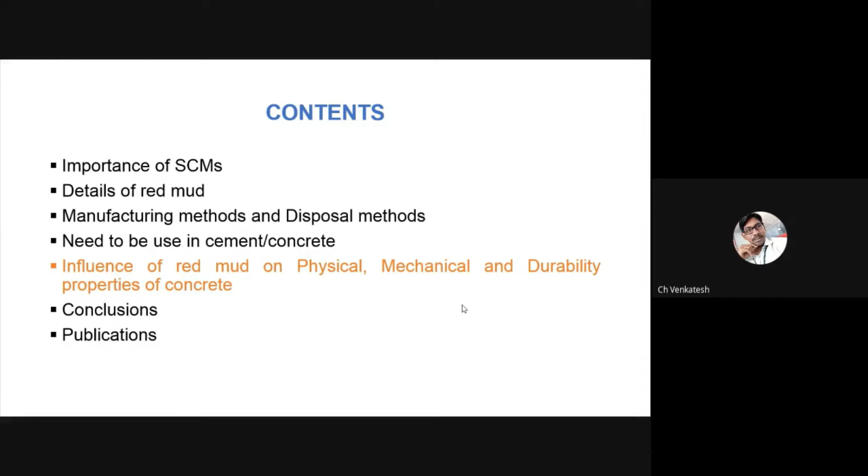Before going to the actual topic of red mud, let me explain the fundamental concept of using supplementary cementing materials in concrete, because the title itself mentions supplementary cementing materials in eco-friendly concrete. So what is the meaning of supplementary cementing materials? Supplementary means it is an alternative cementing material.

So what is the need to take an alternative cementing material into the concrete instead of cement? Does cement have any problem? Technically speaking, there is no problem with cement, but from the point of environmental concern, there is a problem. As we know, concrete is the highest consumed material after water and earth.

For preparing concrete, every year more than 4,000 million tons of cement is utilized. Each ton of cement production emits approximately 0.8 to 1 ton of carbon dioxide. Every year, 8 to 12 percent of carbon dioxide emissions come from cement industries into the environment. This is a major contribution. Seriously, cement causes several environmental problems like pollution due to carbon dioxide and consumption of many natural resources, leading to a scarcity of natural resources for forthcoming generations. So I think you might understand that there is a problem with cement from the environmental point of view.

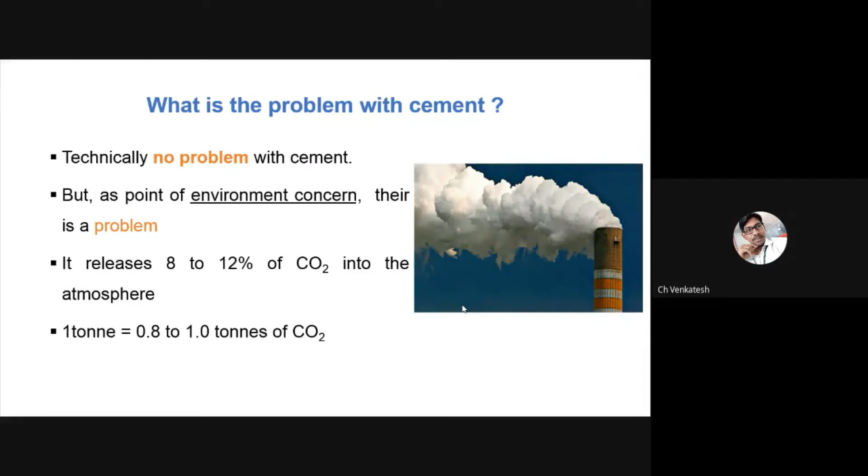Then, if there is a problem with cement, what is the need of using supplementary cementing materials? Do supplementary cementing materials take out this cement from the problems? Let us discuss this elaborately.

In this world, many major industries already exist, like alumina industries, steel industries, thermal power plants, silicon industries, and many agriculture industries. Each industry disposes of million tons of waste in open lands every year, which causes several environmental problems. For this reason, the industrial management as well as the respective government of the state is worrying about disposing this waste into the best possible method.

On another side, concrete researchers are also searching for the best alternative material to replace cement and prepare eco-friendly concrete. In the early ages, concrete researchers started doing research on industrial byproducts.

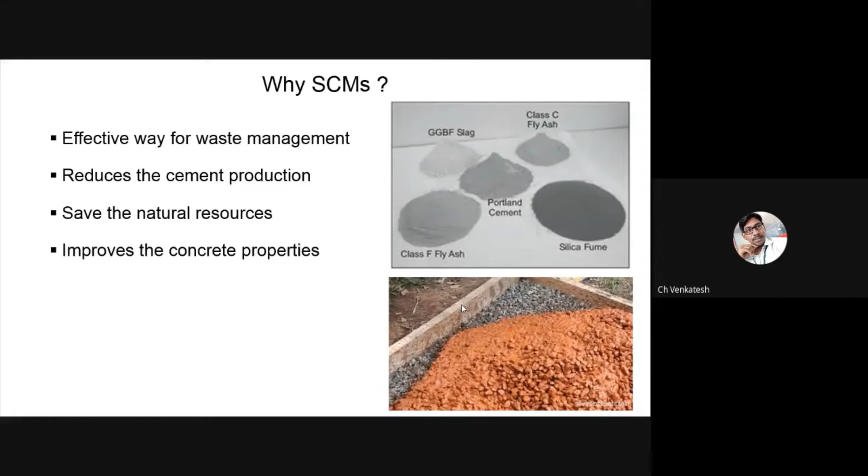They found some industrial byproducts like fly ash from thermal power plants, GGBS from steel plants, red mud from alumina industries, silica from silicon industries, and rice husk ash from agriculture industries. They identified these cementitious materials and incorporated them into concrete, and concluded that these alternative cementitious materials not only help minimize cement production and pollution due to industrial disposal, but also give good strength and durability to concrete. This is the reason why we use supplementary cementitious materials in concrete. So here, why I am explaining about these supplementary cementitious materials is because red mud is also a supplementary cementitious material.

So that's why that concept may be utilized in the future.

So coming to today's topic, red mud. Red mud is a byproduct of alumina industries. As like fly ash is a byproduct of power plants, and GGBS is a byproduct of iron industries, red mud is a byproduct of alumina industries.

In the alumina industries, the Bayer process has been adapted to extract alumina from the bauxite ore. The main aim of the Bayer process is to extract the alumina from the bauxite ore. Let me discuss this in detail. In the Bayer process, the raw bauxite ore is dissolved in concentrated NaOH with high pressure and temperature.

In this process, some of the waste comes out from the filters, and that is called red mud. Here in the Bayer process, 1 ton of alumina produces more than 1.5 tons of red mud as waste.

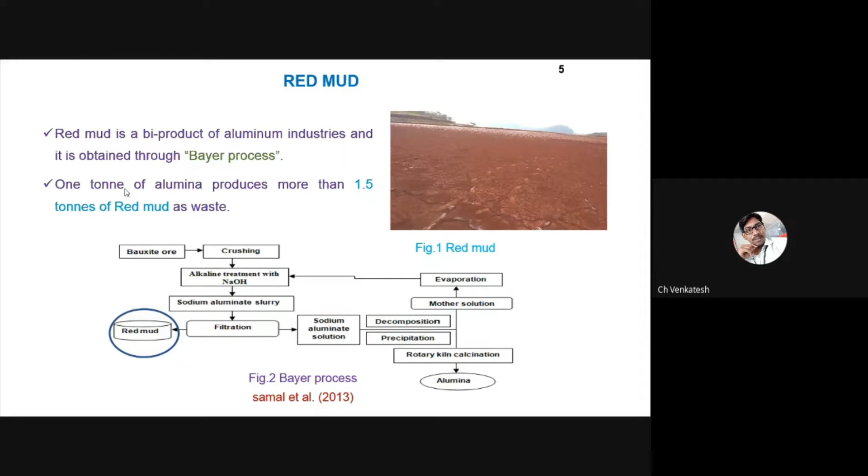So here comes the disposal of the red mud. Every year more than 300 million tons of red mud is produced throughout the world. Similarly, in India itself, 25 million tons of red mud comes out from various alumina industries, those are Nalco, Balco, Hindalco, and many others. This huge disposal is very difficult and requires a lot of land.

Throughout the world, two effective disposal methods are followed for the disposal of red mud. One is the lagoon method, another is the lake method. In the lagoon method, artificial ponds are created for disposing of this red mud in slurry mode or dry mode. In the lake disposal method, the red mud is directly disposed into water bodies like lakes, seas, and rivers.

Even though these are effective disposal methods, there are certain disadvantages. At any cost, the disposal of red mud on open land is very dangerous to the environment, because it has a high alkaline nature. This high alkaline nature doesn't help any vegetation grow on the open lands.

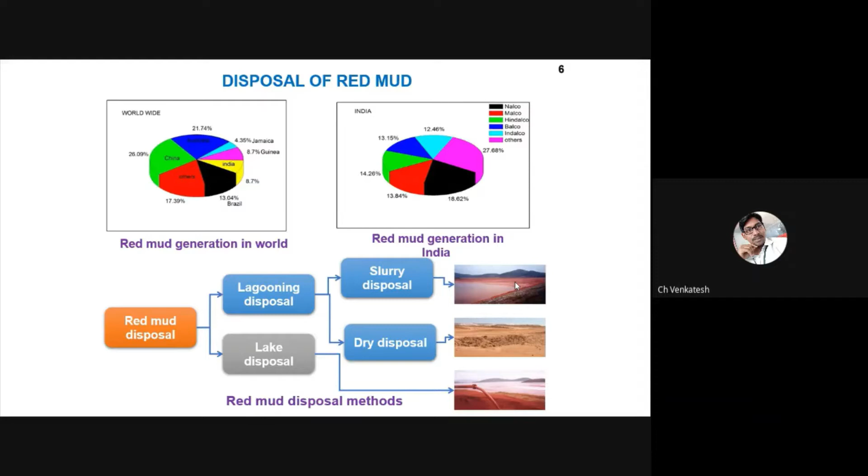So obviously this is a huge disposal problem, and it is very difficult to dispose of. In such cases, industrial management has planned to use this red mud in some building materials, such as preparation of bricks, stabilized blocks, and lightweight aggregates.

Some industries are also encouraging using this red mud as a paint. Other industries have suggested that we can produce polymer products and ceramic tiles, and also utilize it in metallurgical industries.

Anyway, their major aim is to reduce pollution due to red mud. For that reason, they started investigation on utilizing it in building materials. But from the existing literature, this usage is limited to about 4% of the actual disposal, which is very less.

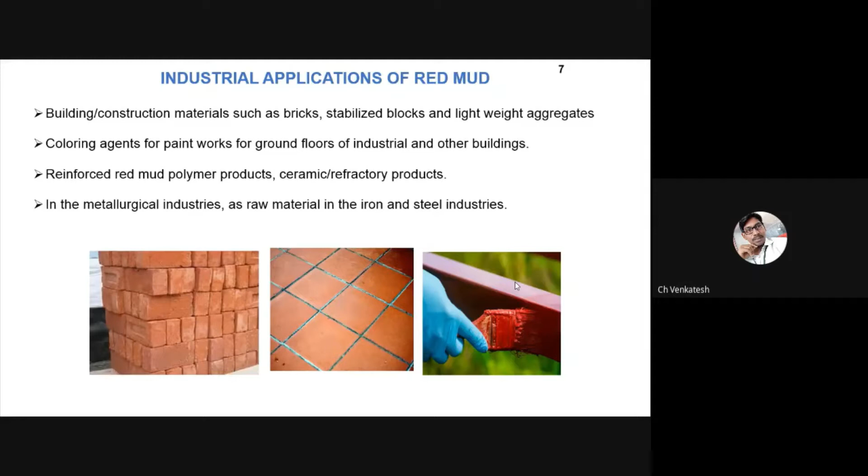So it is very less, and they have not been satisfied. So what more are they doing? Further research to dispose of it in a more effective manner.

So they thought that concrete is the highest consuming material. If you use red mud in concrete, we can minimize the pollution due to its disposal, and on another side, if you use red mud in concrete, there is a chance of reducing the production of cement. So both advantages will help the environment. Because of that reason, red mud is being utilized in concrete.

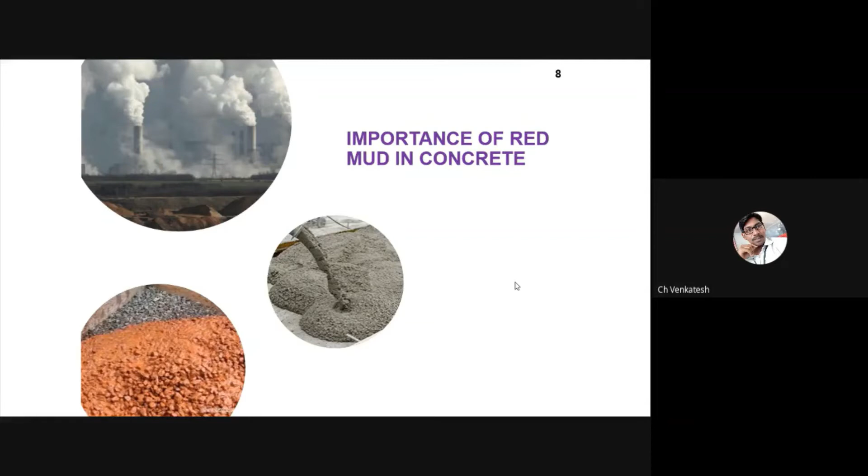Even for this reason, I have selected red mud as my research material. So coming to the research methodology.

We cannot use any industrial byproduct in concrete without knowing its physical and chemical properties. If you want to add or replace it in cement, you should know the physical and chemical properties of that material, and check whether it is suitable for the concrete environment or not. Otherwise, it's a waste of time and money.

So in my research, I started investigating its physical properties, like specific gravity, density, particle size analysis, specific surface area, and mass loss.

Also, the chemical properties, like how much percentage of chemical compounds are present. So I investigated, and based on my investigation, I understand that yes, the red mud has some cementing property, but it requires some push-up, which we have to give either by adding chemicals or by heating at certain temperatures. So in this process, we have adapted the heating process.

So why did we choose heating instead of adding chemicals? If I used any chemicals in the red mud, there is a chance to damage the concrete's health. It may reduce the heat of hydration process, create internal voids, or create surface cracks or shrinkage cracks.

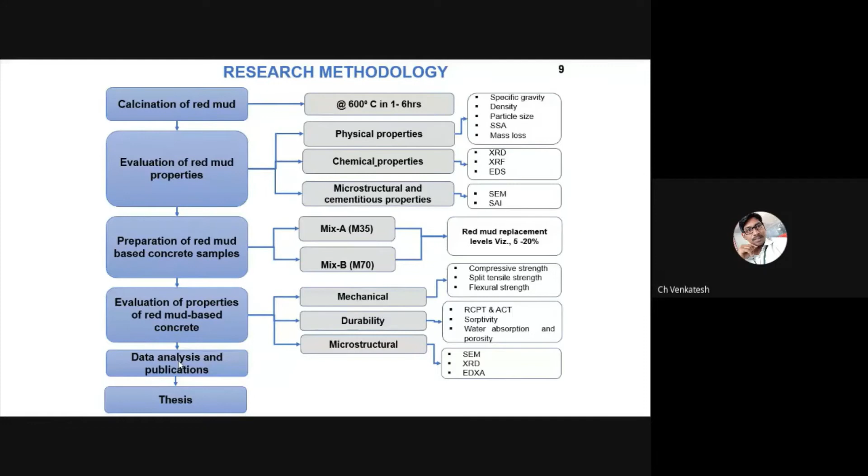So coming to this point, as I told you earlier, we cannot directly keep any supplementary cementing materials into the concrete. So here we found specific gravity, density, particle analyzer, specific surface area, and mass loss.

I think you might be aware of how to identify specific gravity. We have the specific gravity bottle, or we can call it a pycnometer. You take the pycnometer, first weigh it empty and consider it as W1, then add some 25 to 50 grams of cement depending on the pycnometer volume, and weigh that along with the pycnometer—consider it as W2.

After that, you fill the remaining portion with kerosene. Kerosene is a non-reacting liquid, which is why we use it. Then weigh it and consider it as W3. After that, throw out all the materials and take the empty weight of the specific gravity bottle. So we have the formula, and by applying that formula, you get the specific gravity value.

Like with the help of the density bottle, you can also find the density, and we have the particle analyzer. So I found the particle analysis results, and up to 2 hours of heating, the specific gravity, density, particle size, and mass loss were reduced. The reason is that due to the continuous calcination process, the moisture present in the particles is evaporated.

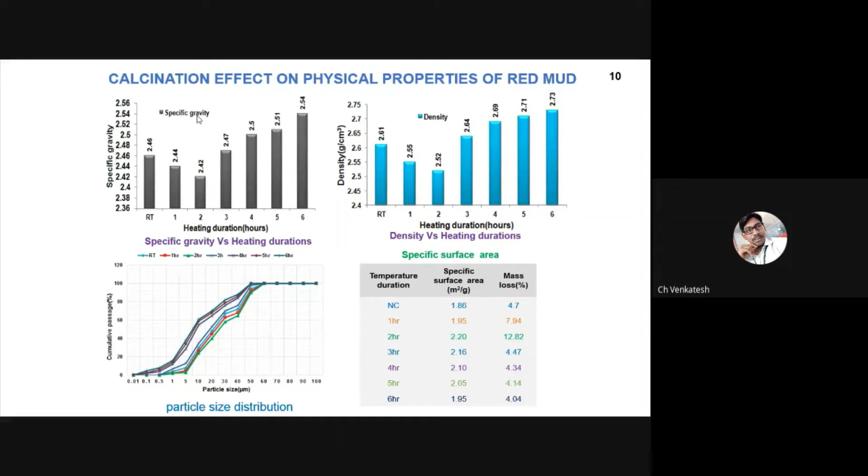Coming to the X-ray diffraction analysis, in the present study we need to know how, with respect to temperature, the red mud changes its transformation. For that, we conducted the X-ray diffraction analysis, and you can clearly observe here that at 0 hours, goethite, hematite, gibbsite, and boehmite were present.

After heating for 1 more hour, the boehmite is converted into alumina. So initially gibbsite converted to boehmite, and boehmite converted into alumina, as seen throughout the XRD peaks.

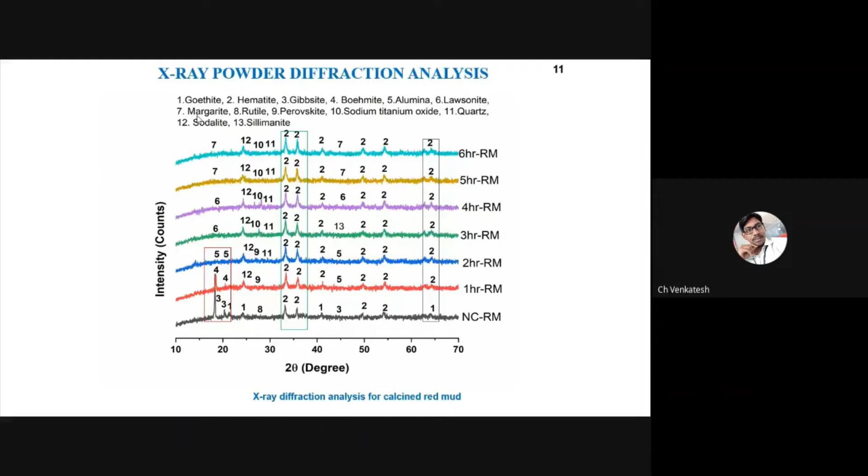Iron oxide is a stable phase, because from existing literature they have mentioned that only after calcining the red mud at 1600 degrees temperature is there a chance of transformation in the iron oxide.

Similarly, here we have conducted scanning electron microscopy analysis to know how the surface morphology of the red mud particles varies with respect to temperature.

From this study, we identified that at 2 hours of calcination, the particles are poorly crystalline. You can observe in diagram A compared to B, B is much smaller than A, and after B there is an increase in particle size.

In the physical properties, we identified that up to 2 hours of heating, the particles are losing their moisture. That's why the physical properties are reducing.

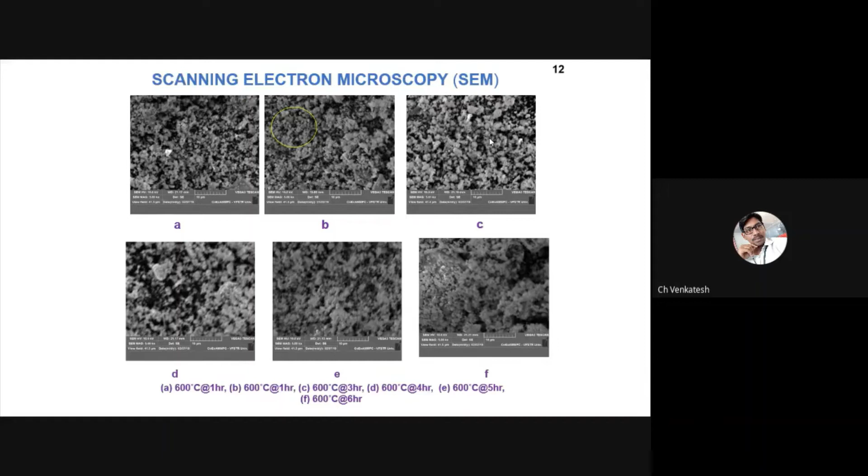After 2 hours of heating, an increasing trend was observed due to agglomeration between the particles. So from this SEM analysis, we can justify that after 2 hours of heating, agglomeration takes place, and there is a good correlation with the physical properties.

Coming to a very important study - we have identified physical and chemical properties. Now, an SCM's duty is to be incorporated into cement and concrete, so we need to know its pozzolanic property. If we want to use any cementing material in concrete, we should know its pozzolanic property. There are generally two methods.

One is the calcite consumption method, another is the strength activity method. Here I am explaining the strength activity index method - this is a very important study. I conducted this strength activity index test with the help of ASTM C618. The study is very simple.

First, you need to prepare a normal concrete sample, cure it 28 days in water, take out the sample, and identify its compressive strength. Similarly, you prepare a concrete sample with the help of your cementing material, cure it 28 days, and identify its compressive strength.

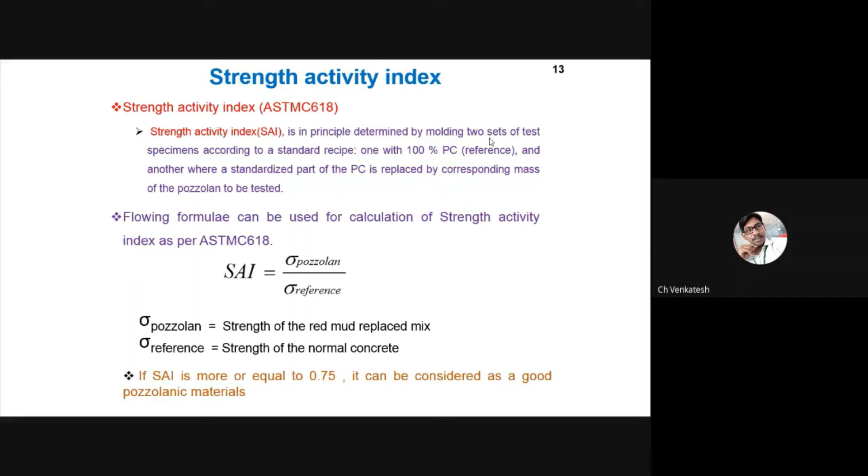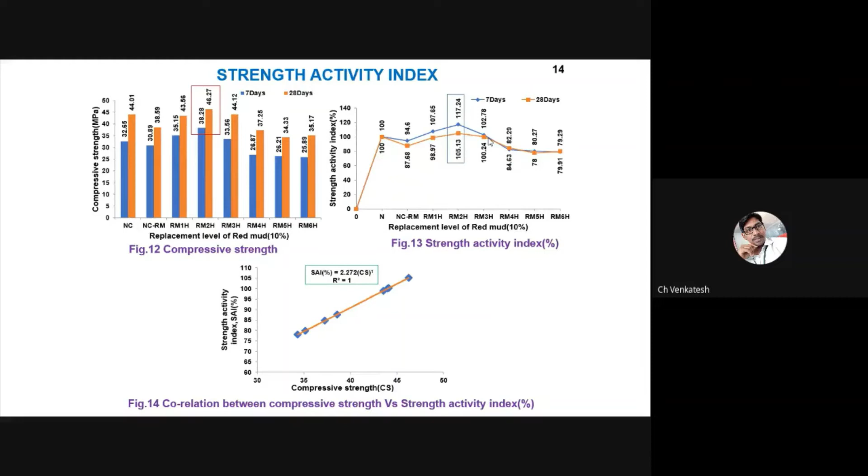Then I randomly replaced 10% and evaluated the compressive strength of all the calcined red mud samples. I obtained that 2 hours has got maximum higher strength, because in the microstructure analysis we also proved that at 2 hours calcination time, the red mud particles are poorly crystallized - that's why we got maximum strength here.

Coming to the physical and mechanical properties - here onwards I will spend much time on how to perform the study, and I will take 2 to 3 minutes to explain how the results varied.

In the physical and mechanical property studies, I have explained that 2 concretes are prepared. If you want to use any cementing material in concrete, you should understand how the material performs in the design mix, nominal mix, and high strength mix. For that reason, in my study I took 2 grades of concrete - M35 grade and M70 grade.

In the physical properties, I identified fresh properties - setting time, flow table test, and slump test. In the mechanical properties, I identified compression, split, and flexural strength.

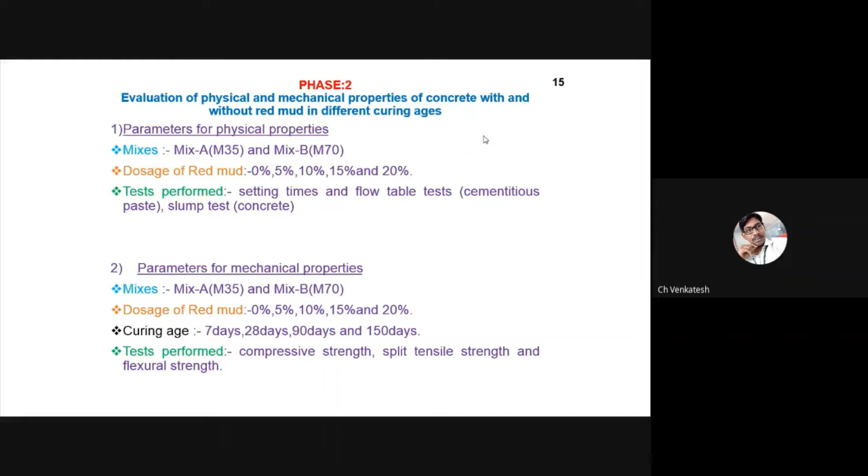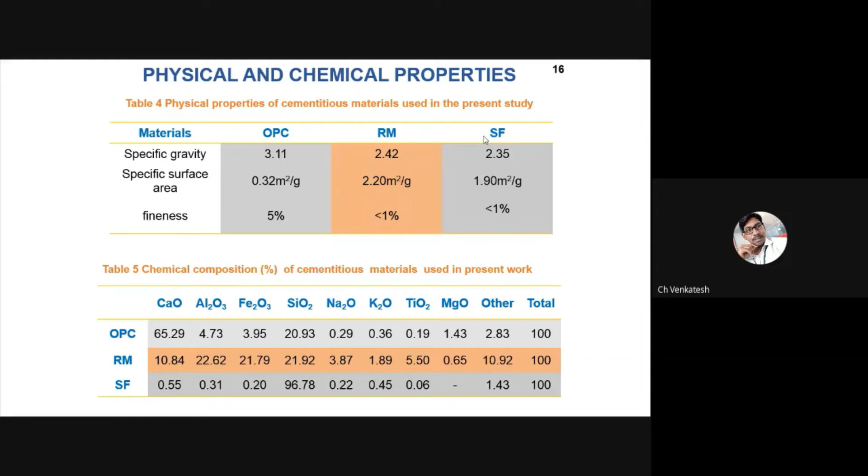Only then will we achieve high strength. Okay, now coming to the fresh properties.

In the fresh properties, as I told you earlier, I have conducted the setting time tests. You know about initial setting time and final setting time. With the help of the Vicat apparatus, we can measure both the initial and final setting time as per IS code 4031. The minimum initial setting time should not be less than 30 minutes, and the final setting time should not be greater than 600 minutes.

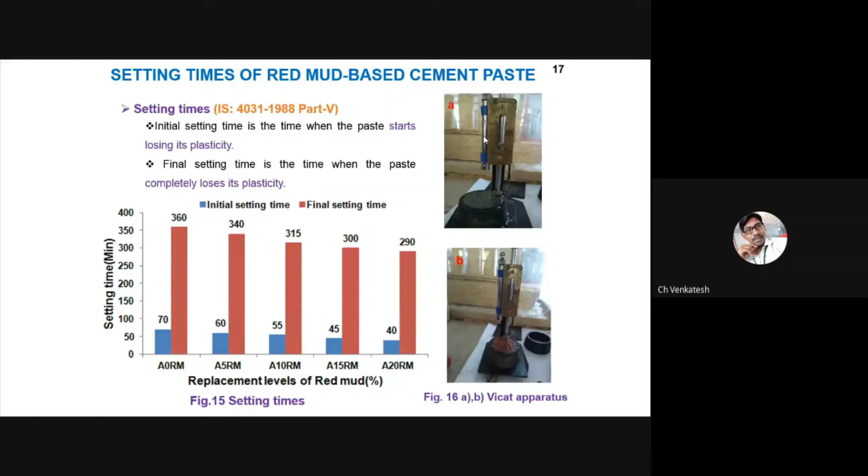In my study, increasing the replacement level of red mud decreases the setting time. The reason is that red mud contains a higher percentage of sodium and aluminate, which accelerate the hardening process. From this result, I can tell you that whenever you are constructing a building or structure in cold countries, red mud may be very helpful for the hardening process.

Coming to the flow table test or slump cone test, I used to call this our workability study. Here in the workability study, we conducted the slump flow test and slump cone test. You might be aware of the slump cone test, but in case of the slump flow test, we have the slump flow apparatus and mold. We need to pour the cement paste or red mud paste into the mold and apply 25 tamps with the help of 25 hits.

Due to that hitting, the red mud paste or cement paste spreads. You need to measure how much diameter the cement paste has spread. Based on that, you calculate the flow value of your cement paste or red mud cement paste.

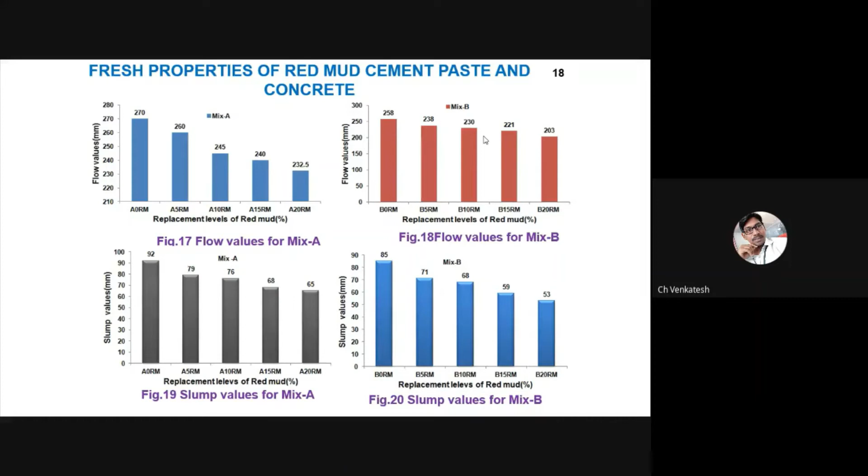Here also, as we increase the content of red mud in the concrete, the workability is reduced. The reason is that red mud particles are very fine particles. Whenever the particles are very fine, they absorb or demand more water. This is the reason for reducing the workability.

This is the mix calculation I used in my research work. This was done as per IS 10262:2009.

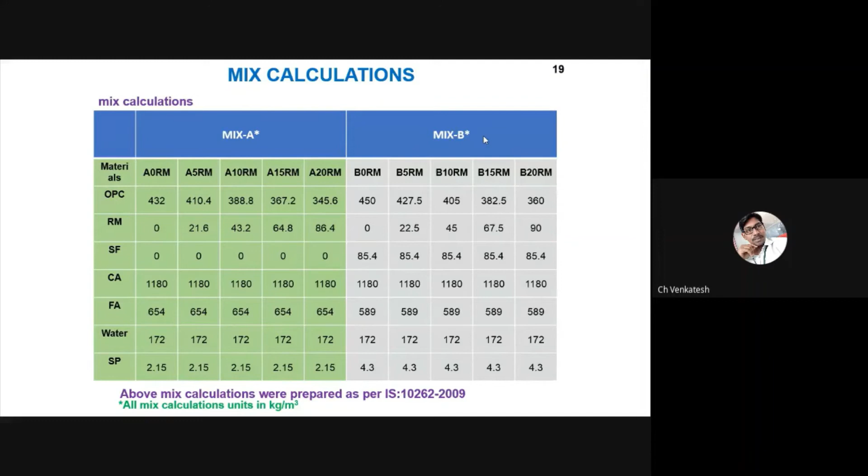Coming to the mechanical properties, okay. We prepared the concrete cube samples with a size of 150 by 150 by 150. After casting the concrete specimens, after 24 hours, the specimen was demolded. After 28 days, curing was applied, and on the next day after 28 days, we took out the sample and performed the compressive strength test.

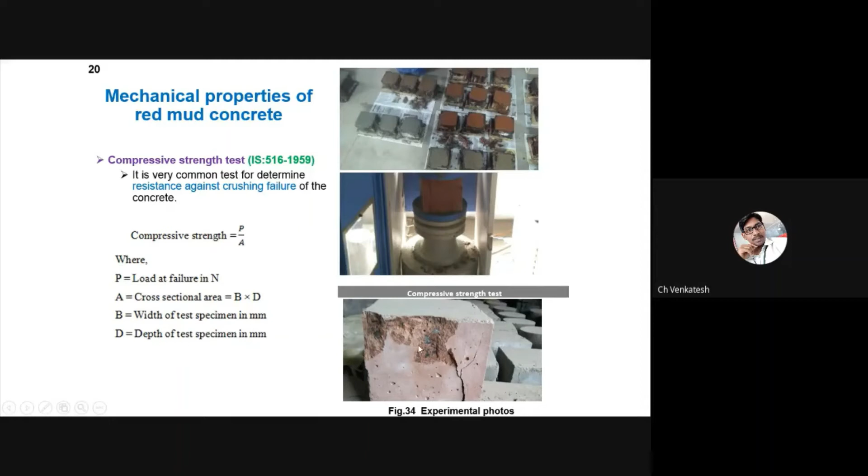So from the compressive strength test, what do we get? We can get the resistance against crushing failure — how much compressive load the concrete sample can take before failing. You divide the load by the area and you get the compressive strength. Here you can clearly observe the crushing failure.

Coming to the next one, split tensile strength. Strictly speaking, there is no direct method to identify the tensile strength of concrete, that's why I call this the indirect tensile strength. Here you can also clearly see how the concrete sample splits exactly. In case of the concrete cube, we applied the failure load on the surface of the concrete sample, but in case of the split tensile strength, the sample was completely split. The reason is that in case of the cube, the load contact area is very high, while in case of the tensile strength test, the load contact area is very less.

You can see here in the compressive testing machine, the load is initially applied on a steel rod, and that steel rod rests on the concrete specimen. So the area where the rod contacts becomes critical, and there is a chance of developing more critical stresses at that point. That's why the concrete sample splits.

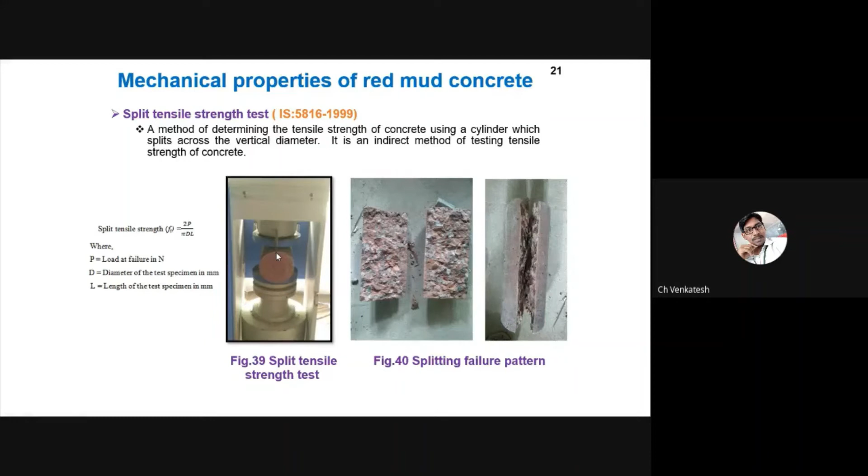Coming to the mechanical properties, as I told you earlier, I performed the compressive strength, split tensile strength, and flexural strength tests. In this study, the compressive strength increases up to 10% red mud replacement. After that, a reduction was observed in all the mechanical properties. The reason is that at 10%, there is sufficient pozzolanic property, but after that, due to insufficient water availability, the pozzolanic reaction is minimized. That's why after 10% replacement, all the mechanical properties are reduced.

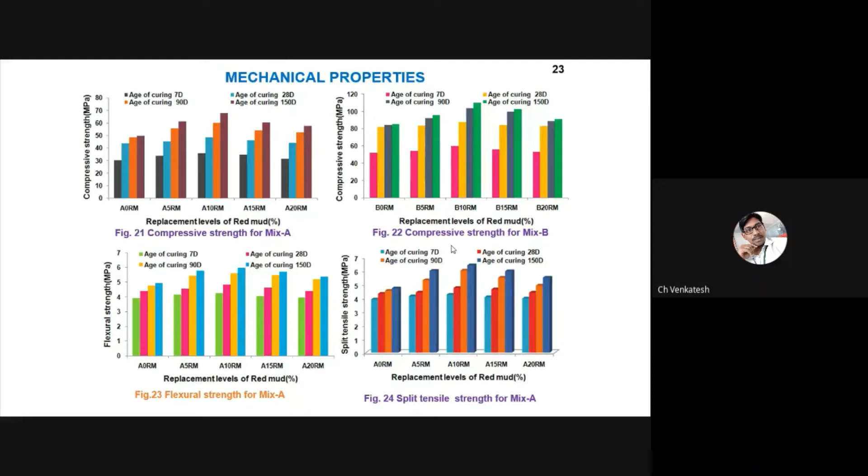Okay, so coming to the normalized values. Even all cementitious materials will definitely increase a certain percentage of the mechanical properties. So what is the speciality of this red mud?

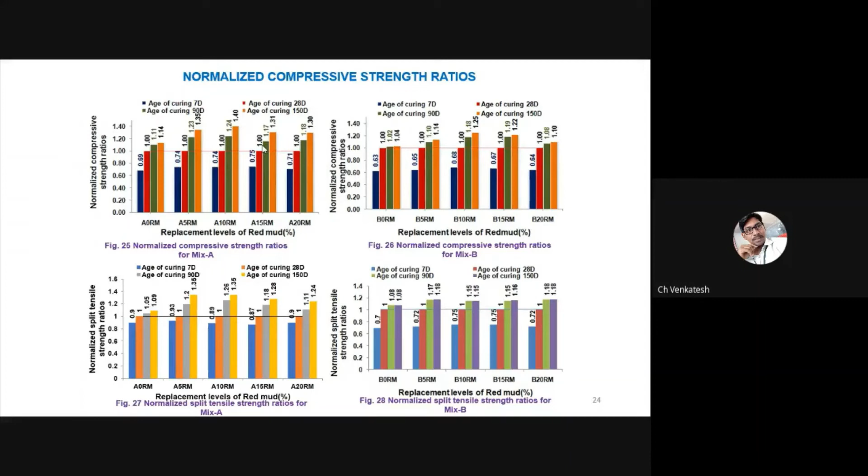As I told you earlier, these red mud particles are very fine particles. They hold the surrounding moisture content, and that moisture content is utilized for the secondary pozzolanic reactions in the later ages. This is the reason for developing high strength in the later ages also.

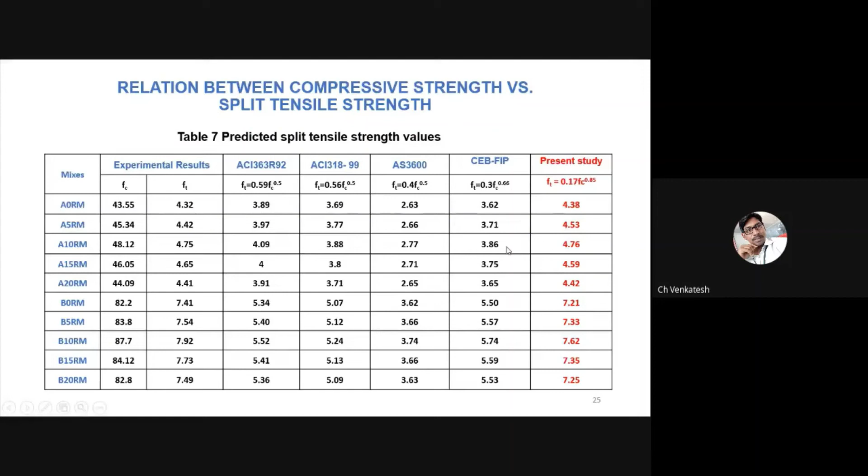Very interestingly, in my study I also compared my results with existing IS codes, and I have prepared a formula based on my investigation: 0.17 FC to the power 0.85. I prepared this formula from my results. I compared my formula with all the existing codes - ACI code, Australian code, and European code - and found a good correlation with my results compared to the other codes.

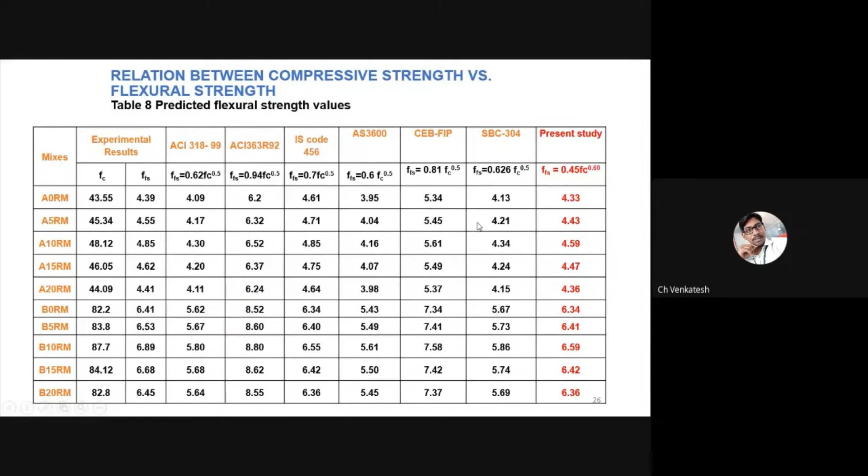Coming to the very important aspect - durability. Some concrete has high early age strength, some has later age strength. But when it comes to durability, the concrete should be durable from day one up to its lifespan, whatever lifespan the concrete has. Durability is nothing but maintaining the engineering properties of the concrete over its lifetime without change. That is called durability.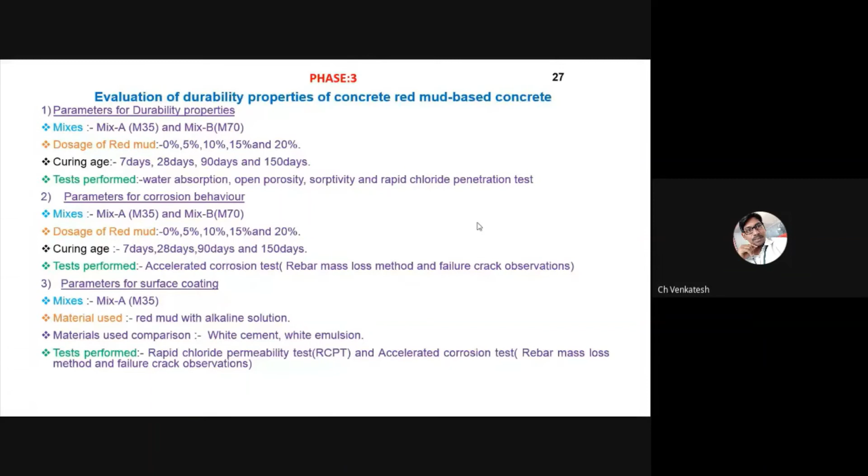In the present study, to understand durability, we have conducted water absorption, open porosity, sorptivity, RCPT, and other studies. Let me explain the studies elaborately, then I will skip the result part. Coming to water absorption - I performed this with the help of BS code 1881-122. This code suggests that, first of all, if you want to know the water absorption - what is water absorption? The concrete absorbs an amount of water when it is completely immersed in water.

For this study, we have to prepare the concrete sample, cure it for 28 days, and after that keep the sample in an oven at 105 centigrade for 72 hours. The reason for keeping the sample in the oven is to take out the moisture present in the concrete sample. After that, you can take the dry weight of the sample.

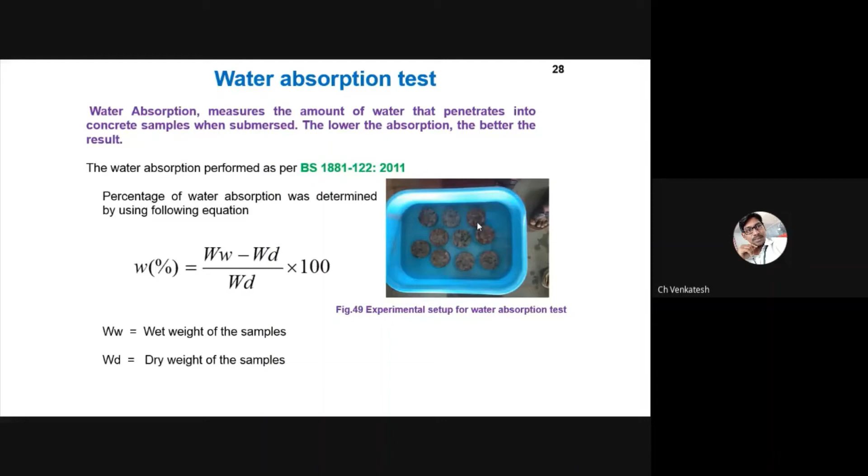Then you keep the sample in water for 24 hours. After that, take out the sample, wipe out the surface moisture, and weigh that sample - you consider that as the wet weight. Wet weight minus dry weight, divided by dry weight, into 100, will give you the water absorption percentage. If the concrete absorbs more water, that indicates poor quality. If the concrete absorbs less water, that concrete is more durable.

Similarly for porosity - I conducted this as per ASTM C642. The main aim of porosity is to find out the amount of void space available in the concrete particle. For this study also, we have to take a known volume of water, and as I told you earlier, we have to dry the sample at 105 degrees for 72 hours to remove the moisture content.

After that, for porosity, you also need to keep the sample in water for 24 hours so that no further water will be absorbed by the concrete. Then you keep the sample in that known volume of water - once you place the concrete sample, the water volume will increase. The actual volume of water minus the increased volume of water is used to calculate the porosity percentage with the help of this formula.

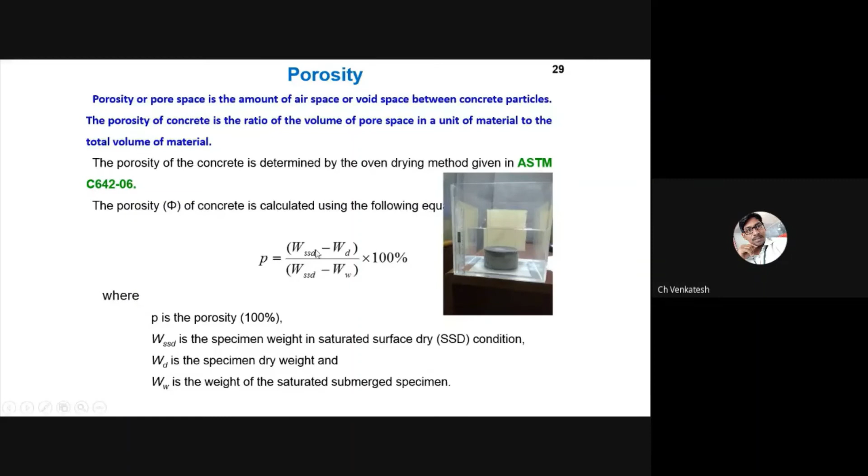So the next one is sorptivity. This is also one of the important tests. Sorptivity is nothing but the water absorption by the concrete sample through capillary action.

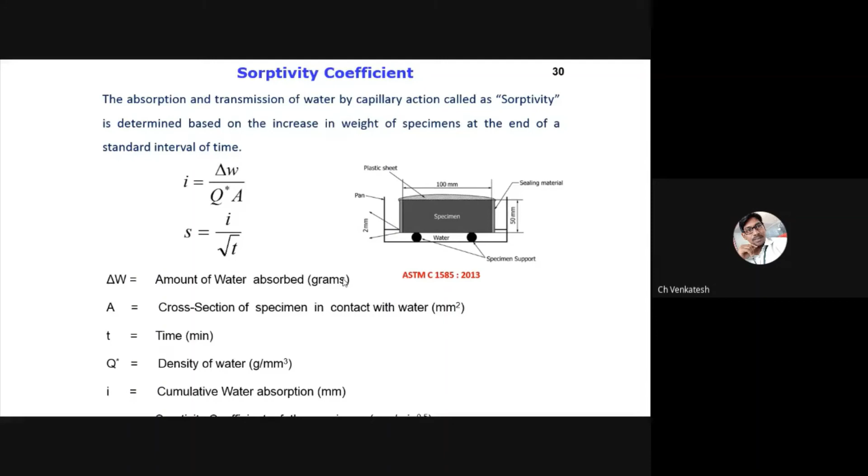In this process, we have to prepare the concrete sample with a size of 100 diameter and thickness of 50 mm.

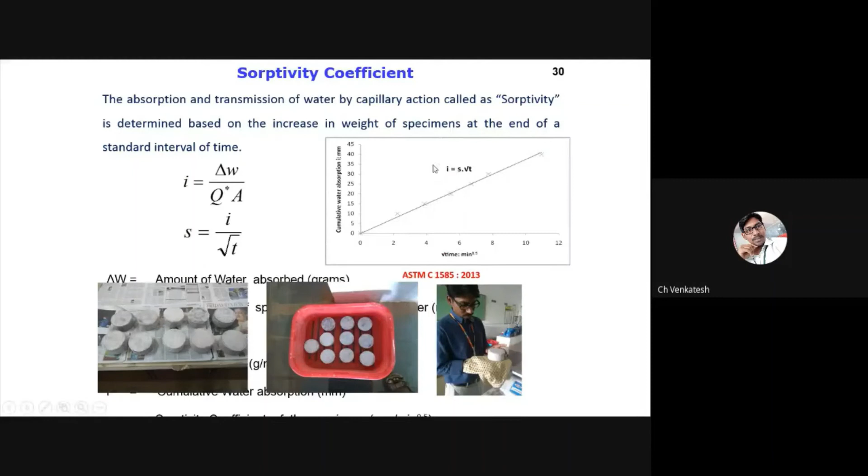We have to apply wax on three directions, so one direction is free, meaning we can allow water to penetrate from that uncoated side. We measure the weight gained by the concrete sample with respect to time using the formula i/√T, and analyze the results to get the sorptivity value.

Coming to a very important test, the rapid chloride permeability test. It is a powerful test to identify the permeability of concrete. As per ASTM C1202, we conducted this RCPT test.

Here there are two chambers. One chamber is filled with sodium hydroxide, the other is filled with 3% NaCl. The concept is that whatever NaCl is present in the chamber should pass through the concrete sample and reach the NaOH.

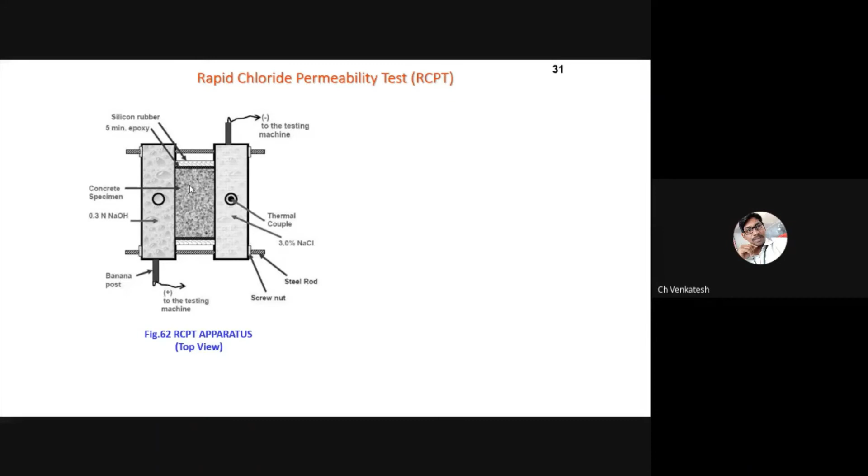This passage happens with the help of 60 volts of current. If your coulombs passed is more than 4,000, the concrete has poor durability. If it is 2,000 to 4,000, the concrete quality is moderate. Like that, we have to justify the performance and quality of the concrete.

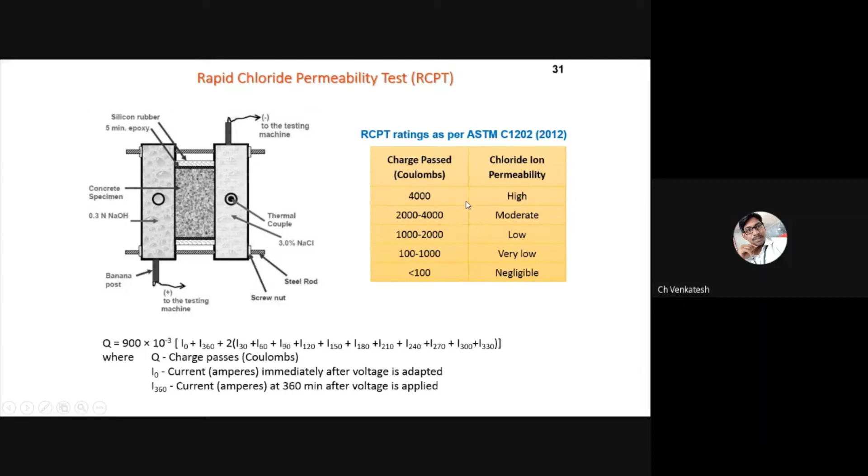Coming to another powerful tool, the accelerated corrosion test. In this, we have to identify the corrosion behavior of the concrete. For that, you have to prepare a cylinder sample with a diameter of 100 and height of 200. While casting the sample, you have to insert the steel rod inside the concrete from the bottom up to 50 mm, which we generally call the cover.

Here also you have to connect the positive cable to the steel bar and the negative cable to the steel plate, then apply continuous power of 10 volts until you get the crack.

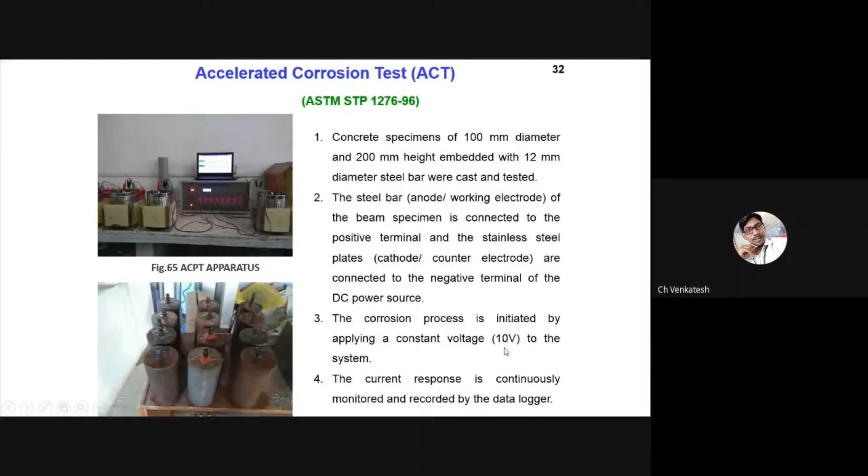After corrosion, the sample will look like this. You can see here clearly how red mud behaved compared to the normal concrete. In the normal concrete, the sample is completely corroded, while in the case of red mud, it is only partially corroded.

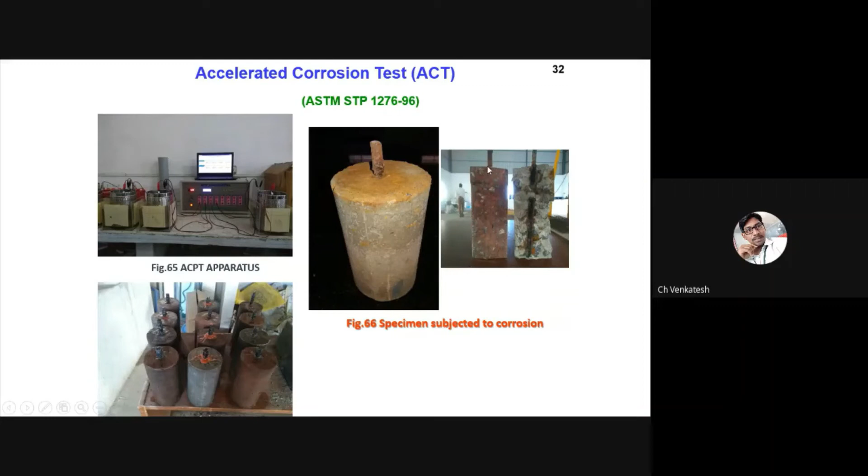So from all the durability tests—water absorption and porosity, sorptivity, passage of coulombs, and corrosion—increasing the replacement level of red mud increases the durability. The reason is that most red mud particles occupy the concrete pore structure, becoming a seal to the concrete so that no external agents can enter inside the concrete. This is the reason for the good durability property.

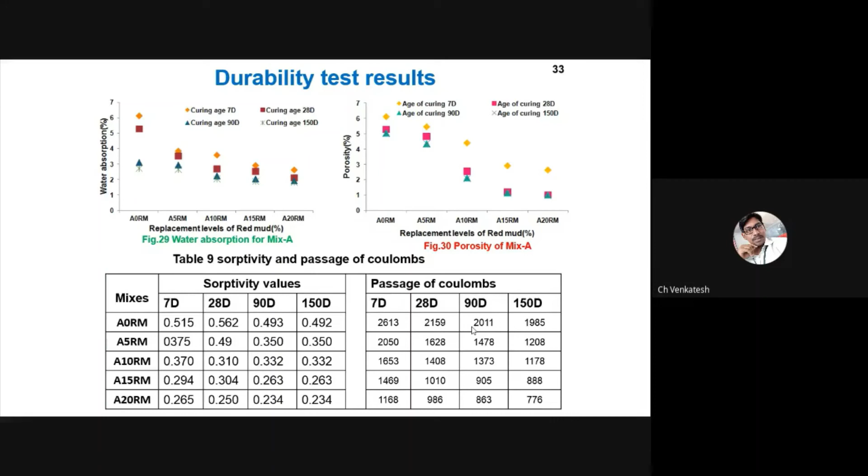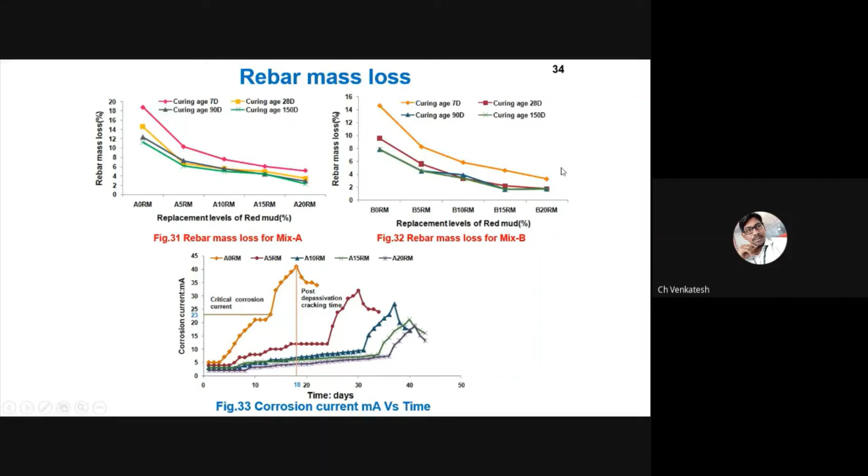In the corrosion test, the mass loss is also reduced with increase in red mud. We can measure corrosion in two ways: up to crack observed, or up to mass loss. In both cases, a similar trend of results was observed.

Coming to the sampling for microstructure analysis, I will finish within 2 minutes, so just be patient. I conducted the microstructure analysis because I had proven that red mud has good mechanical and durability properties from the experimental study, and I needed to justify clearly whether the concrete's inner properties support this behavior or not.

In my study, I conducted SEM analysis and XRD analysis. For preparing the sample for XRD, after 28 days of curing, you identify its compressive strength, take the sample from the broken test piece, grind it into powder, and perform the X-ray diffraction analysis to find the hydration compounds present in your concrete at that age.

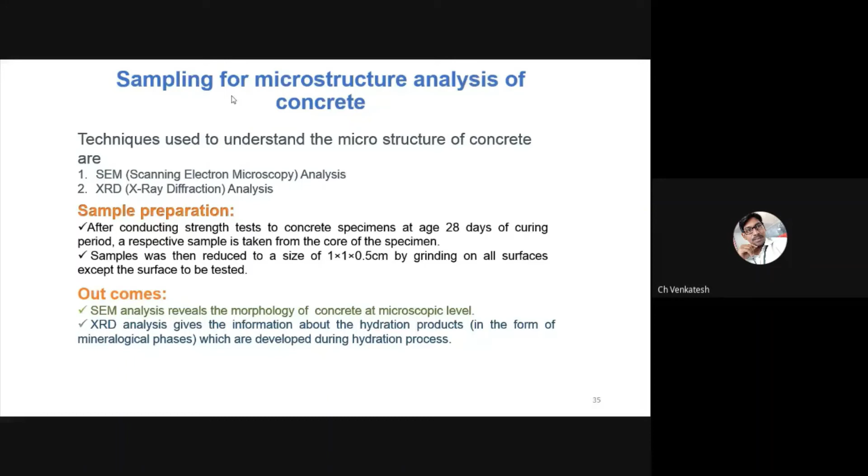For SEM analysis, you don't need to grind it into powder. You can give a solid piece with the size of 1 cm by 1 cm by 0.5 cm, so that you can know how the concrete surface is formed.

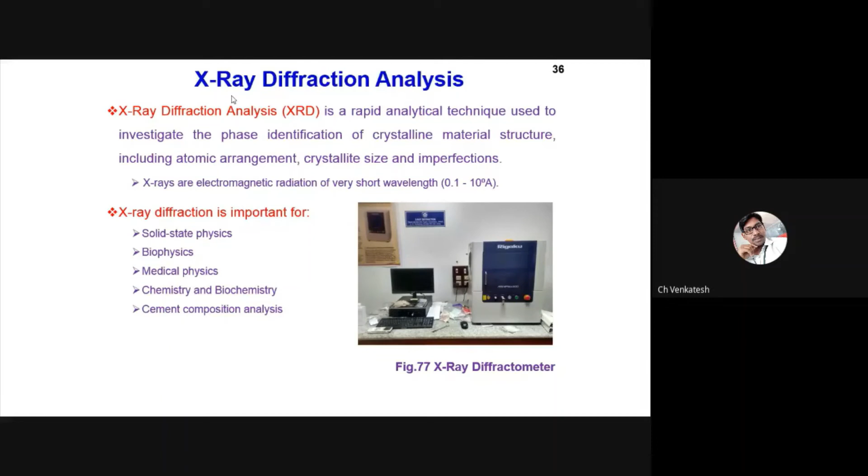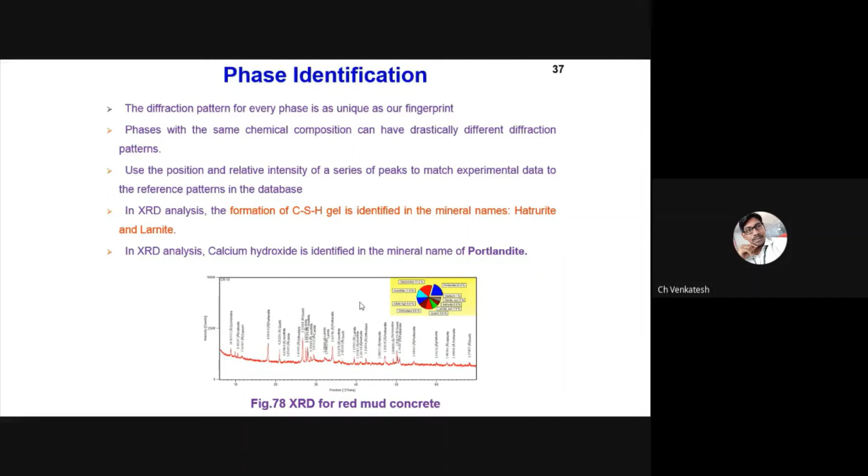Coming to the X-ray diffraction analysis, as I told you earlier, we can find out what hydration compounds are present in the concrete. In my entire study, I conducted this XRD analysis with the help of the X'Pert HighScore software for identification of peaks.

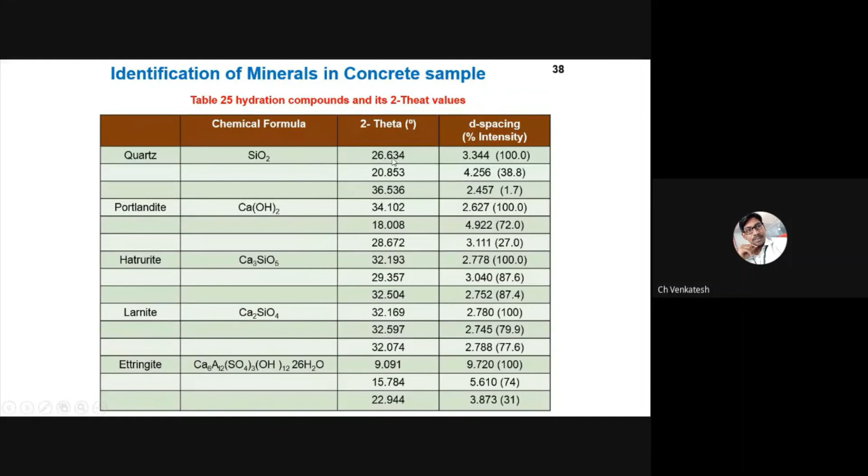So these are the peaks I have identified in my research work. Generally in the XRD data, you will get the intensity and 2 theta values. Coming to the X-ray diffraction analysis, for comparison purposes I have kept all the XRD graphs on a single slide. In the present study, I have identified Larnite, Portlandite, Ettringite, Hatrurite, and Quartz.

These are all very important. Portlandite helps develop pozzolanic reactivity. It keeps the pore solution alkaline when the sample has alkaline nature, which gives good pozzolanic activity. Larnite and Hatrurite are belites or alites, also called C2S and C3S. These are all indications of the presence of calcium silicate hydrate gel.

And quartz, the presence of quartz reacts with the calcium present in the concrete, so that it develops calcium silicate hydrate. Generally Ettringite will be present at 7 days, due to the percentage of sulfate and calcium. These are the quantifications I found from the X'Pert HighScore software.

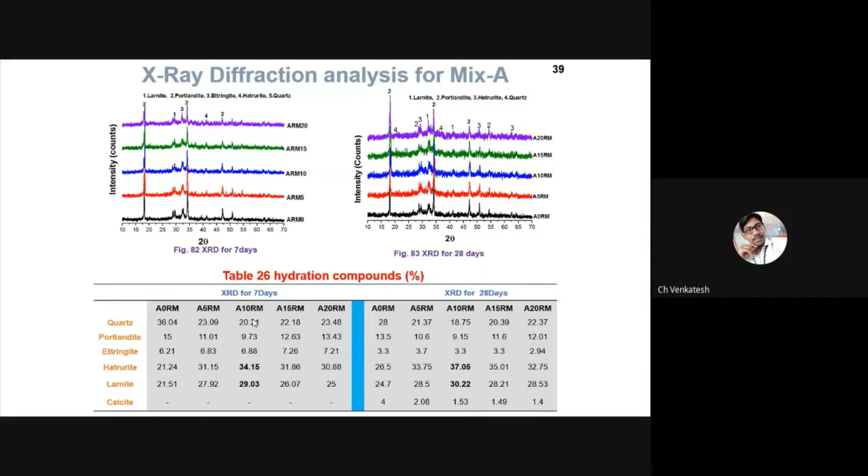So here I found that at 10% replacement, I observed a higher percentage of Larnite and Hatrurite. This may be the reason for developing high strength at the 10% replacement level of red mud. As I told you earlier in the mechanical properties, I found that 10% replacement has high compressive strength, high split tensile strength, and high flexural strength. The reason may be the presence of a higher percentage of Larnite and Hatrurite at the 10% replacement level.

Coming to SEM, the scanning electron microscope is generally used to find out how the concrete surface morphology is. In your study, if you find any needle-like structure, you can call it Ettringite; if you find any polygon shapes, you can call it calcium hydroxide; and if you find any flower-like structure, you can call it CSH. For good concrete, the CH should be there.

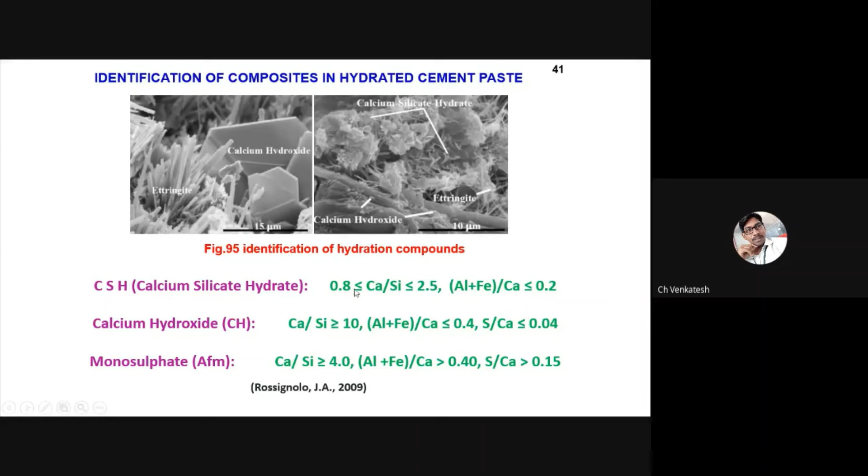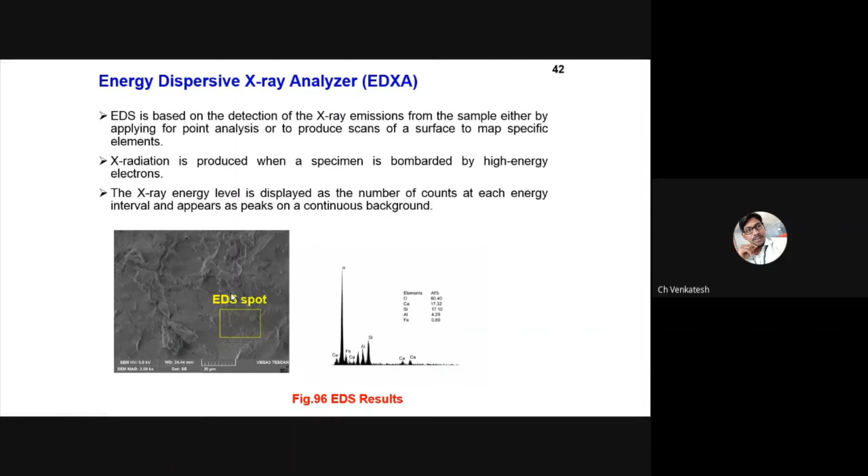So these are the ranges of chemical compounds, and the EDS analysis we conducted to identify the chemical properties and elements of the concrete. So here I can go through it quickly.

Moreover, you can clearly observe the Ettringite formation and the polygon shapes, which we call calcium hydroxide, and also the flower-like section CSH. We can clearly observe this in the red mud based concrete. The reason for minimizing the voids is, as I told earlier, most of the concrete voids are filled with these red mud particles, so the concrete becomes dense. So from the SEM image analysis also, I have shown that this concrete has good properties.

From the EDS point of view also, I conducted EDS analysis and identified that the 10% concrete has a low calcium to silica ratio. Generally, the calcium silica ratio indicates the presence of CSH. Generally, the CSH calcium silica ratio range is 0.8 to 2.5.

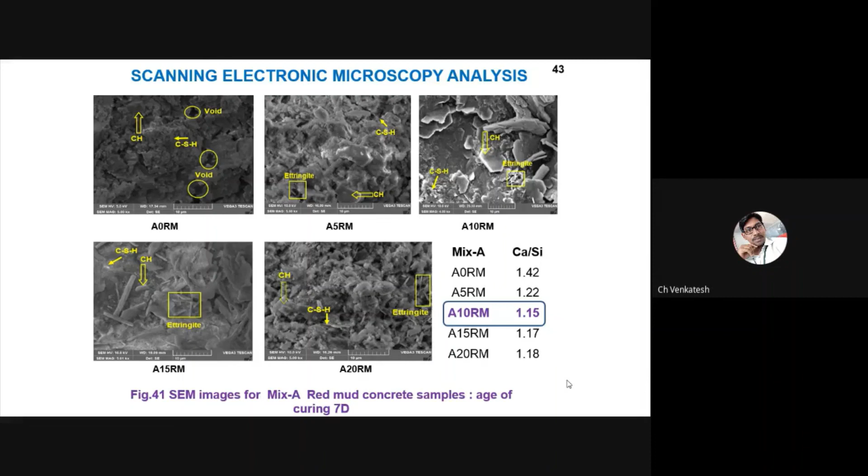Like that, in your research also, you better do the SEM analysis and EDS analysis, so that strong evidence will be with you. These are a few SEM images, and we also identified the ITZ, the interfacial transition zone. Here also I can conclude that the red mud particles are completely bound with the aggregate, and because of that reason, the compressive strength also increases.